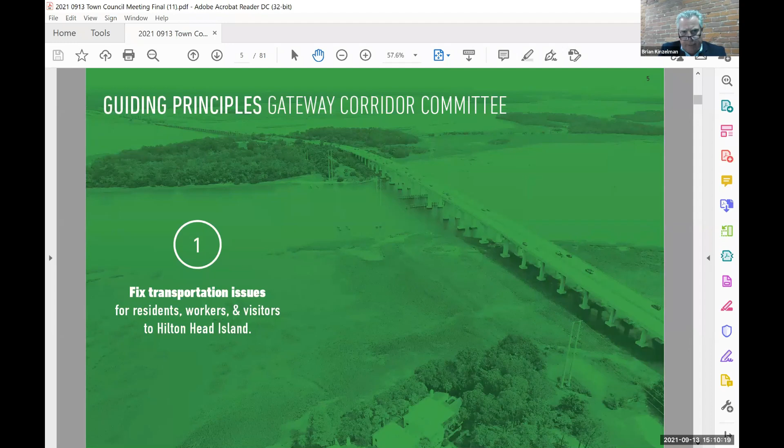The guiding principles, as the corridor committee had put together: the first one is really DOT's goal and principles, and that is to improve and fix the transportation issues as they are perceived to and through the island. Two, though, is the quality of life for the island and everyone affected by the construction and by the traffic itself. And thirdly, to create a gateway to this magnificent community.

This is one of the premier communities in the country, one man's opinion. I don't think I'd get much argument, certainly on the East Coast. The magnificent environment and the water bodies are really our calling card. How do we protect those?

So again, Sean ticked off these. I won't repeat them, but we had numerous contact points, not only with leadership and council, but with the public as a whole. I want to acknowledge the role that the town staff played in this, including the town manager, Sean, and Darren, the town's traffic engineer, who have done a lot of hard lifting on this, and it's greatly appreciated.

What we heard in general terms from the community, everybody's in agreement. We need an attractive gateway to the island, a high level of aesthetics to complement this magnificent natural environment. Those aesthetics will largely be dealt with at the future design phases of the project. Right now, we're dealing with alignments and larger concepts.

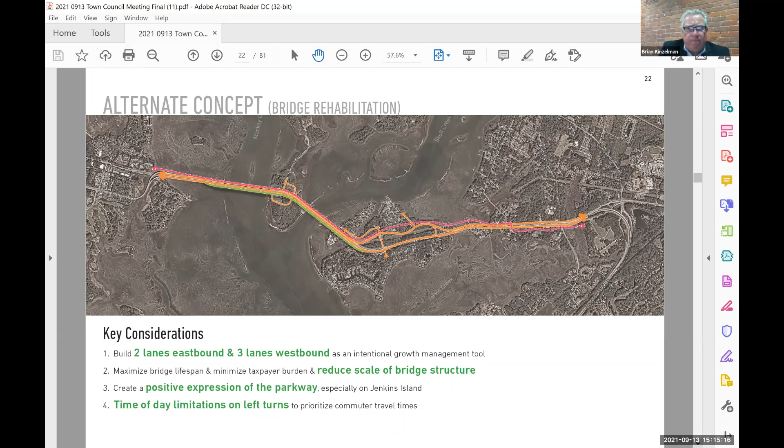So from an engineering standpoint, as suggested, this is 3 lanes westbound, 2 lanes eastbound. It does, though, result in saturated flow. What does that mean? That means a lot of automobiles stacked nose to tail through some of those key travel times.

Restrictions to traffic movements, turning motions, left turn motions are necessary to maintain that traffic flow. This 2-lane eastbound would preclude a traffic signal at Windmill Harbor. There just isn't enough lane capacity to allow for stacking to satisfy a signal without causing traffic to back up over the bridges. The existing bridges must be modified.

There's, as they say, no free lunch. Even if we preserve those bridges and take advantage of their useful life, they still need some work, so that has cost implications as well. Skull Creek Bridge approaching Pinckney will require some wetlands impacts to make all of that circulation work. That's unintended damage, but that is parcel of this scheme.

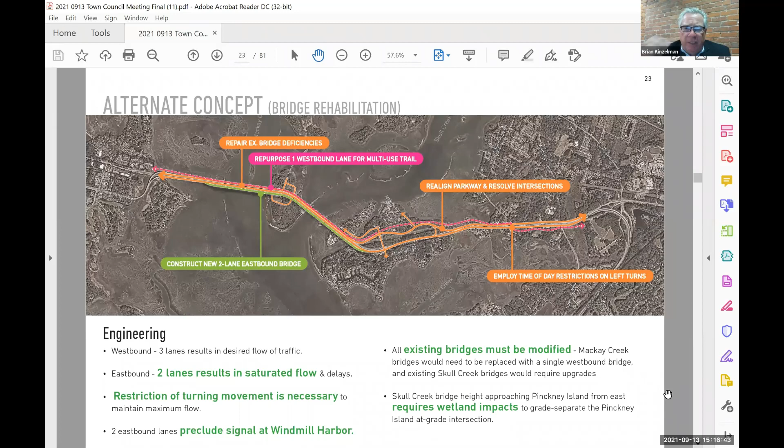But what it does take advantage of is the fact that we've got less pavement and we take advantage of more town ground to create more of an experience. From a performance standpoint, moving automobiles, this results in an additional 9 to 10 minute delay. That's based on our traffic engineers, HDR's traffic engineering analysis, against what DOT has forecast in the future. So it does cause more delays, more traffic and travel time.

During non-peak hours, left turns would be allowed in both directions, but that would be restricted at certain times of day. There's multiple bridge redundancy, so for emergency evacuations, that is certainly a positive.

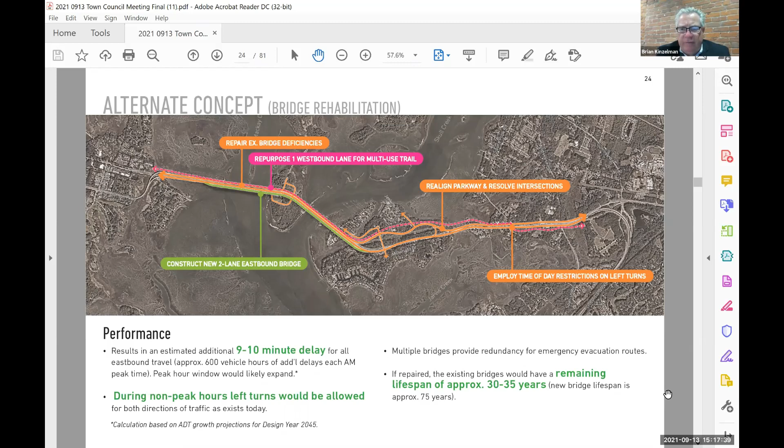If we do repair those existing bridges that remain, we take advantage of 30 to 35 years of useful lifespan within those bridges. From a logistical standpoint, this is a bit more complex than the DOT scheme. That would likely add about 2 more years of construction and design time to the project. I think over time, with that additional time, we'd be eating into any cost savings that there may have been.

Restricted left turn motions are very difficult to enforce. It can be done with signage, can be done with physical barriers and extensive signage, but nonetheless, it's an enforcement issue. Left turn lanes that would be diverted are going to cause folks to continue downstream, and that has implications for those downstream intersections, specifically Gumtree and beyond, for those wanting to make those left turn motions into Hilton Head Plantation.

So there are positives and there are negatives, as you would expect with any concept. The cost, again, one of the keys to this concept would realize a $20 to $40 million savings on the bridge construction compared to what DOT has estimated. But again, the extended timeline might start to eat into those cost savings a bit.

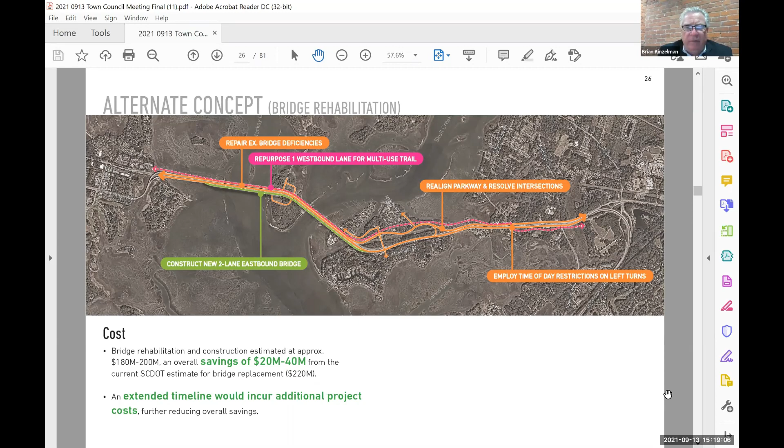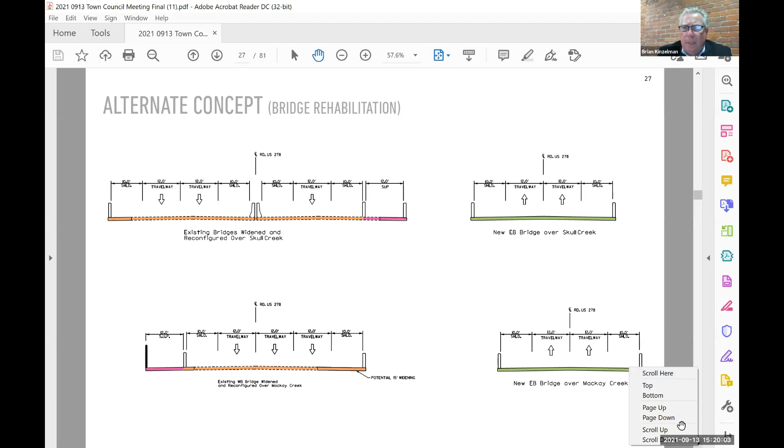Legitimate concept, given maybe the desire to have more control, another tool in the toolbox relative to island growth, and also to save legitimate taxpayer dollars.

So the second concept that has come to our attention is what we're calling the grade separation concept, and that is to create highway construction, roadway construction akin to the Cross Island, literally all the way from Moss Creek to the Cross Island split with no interruptions, no intersections.

This is a shot of what that looks like through the Stoney neighborhood. Again, this is 3 lanes in each direction. It would prioritize unimpeded traffic flow, so for those going with speed to the south end of the island, this will get you there. It eliminates all traffic signals through Stoney.

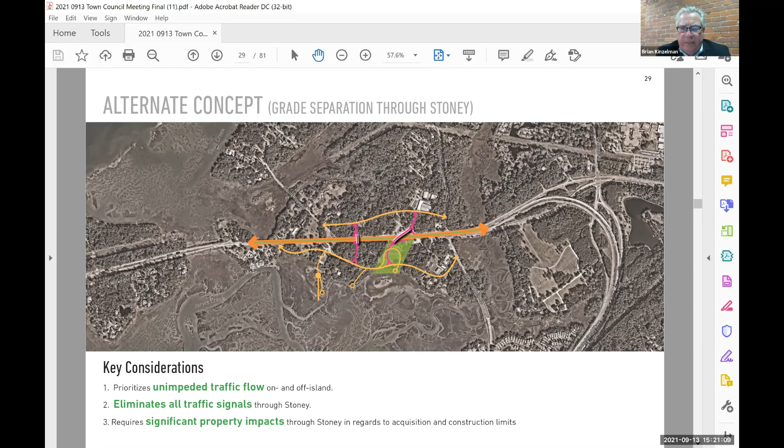It does represent some significant property impacts in the Stoney neighborhood, just due to the real estate necessary to make this work. What this does suggest is that there are 2, possibly could be done with 1, overpass bridges.

You would have exit and entry ramps as you do on limited access highways. You would have backage roads that interconnect those bridges, connecting Squire Pope to Wild Horse, Chamberlain to Spanish Wells, and that's where the east-west circulation happens. North-south passes over the bridges. There are no signals or intersections along the route.

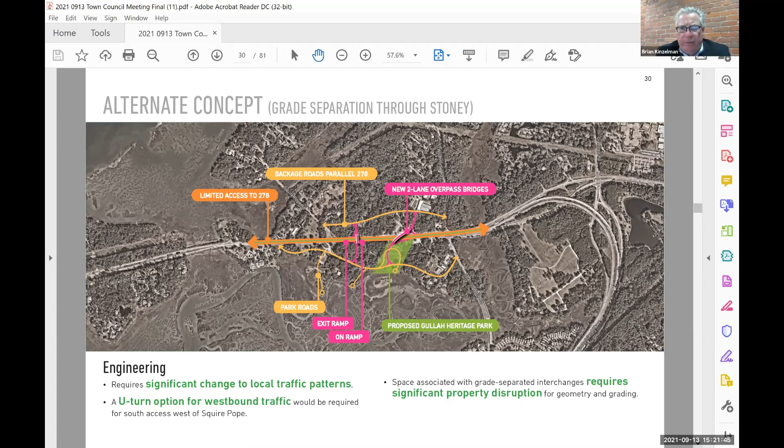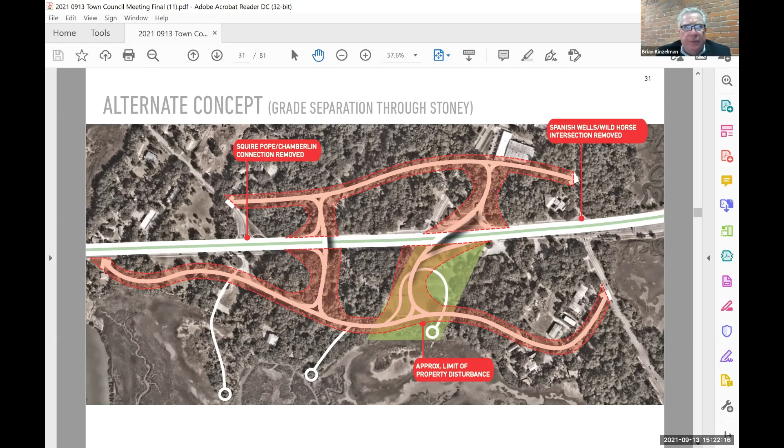So again, the performance of this improves the mainline flow. It likely increases congestion downstream, again, likely at the Gumtree intersection.

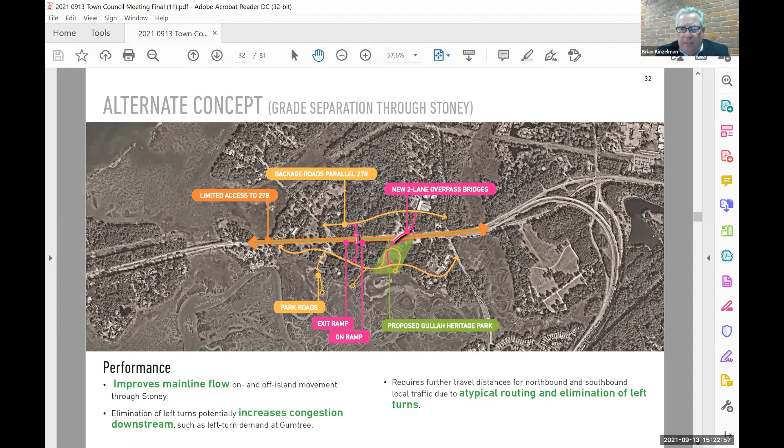This provides an atypical routing for people wanting to get north and south. You're having to get off at an exit ramp, cross a bridge, maybe even double back as it were to get on your assigned roadway, but it's all with unimpeded traffic flow relative to signals on the main line.

The cost and logistics of this, as I mentioned, there's some significant land disturbance due to this roadway construction. That's through the Stoney neighborhood, probably the most sensitive, in fact the most sensitive ground of the whole project. It would expand the project schedule and budget, and certainly for these elevated crossings, that is expensive construction.

The benefit to this is free and safe passage from east to west. That's the benefit of this grade separation.

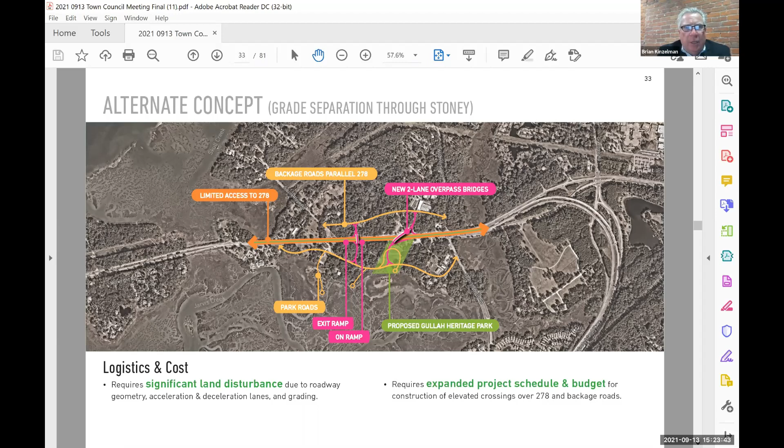We felt it was important to bring those alternate concepts to your attention. That was not our charge, to reconsider all of the precursors to DOT's work, but those were brought to our attention, felt to have some legitimacy, and important to share with the community. Again, our charge has been to create a parkway and not a highway.

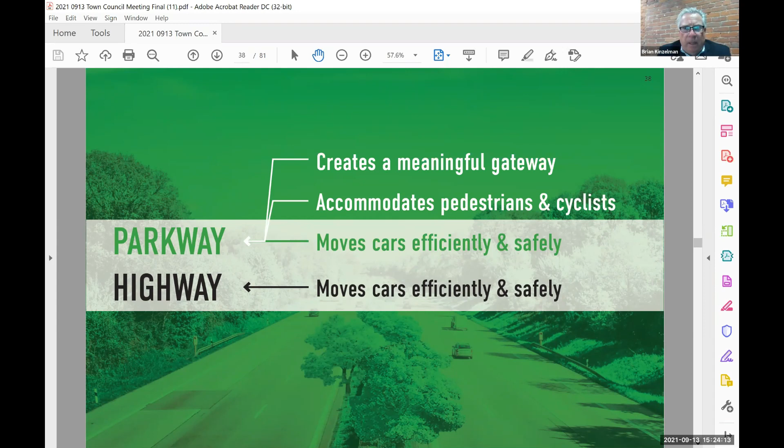We can move automobiles safely and efficiently, as does a highway, but we need to accommodate pedestrians and cyclists. We need to create a meaningful gateway. We can satisfy all of those issues.

A summary of our key recommendations is, again, to create that memorable gateway, a long-term vision for cyclists and pedestrians, eliminate raised curbs in the medians where possible. Let's use those medians as we do elsewhere on the island for drainage, vegetation, and for breakdown when necessary.

Consolidate drives and curb cuts, reduce property impacts to the extent possible, especially through the Stoney neighborhood. Design intuitive intersections, so that we're not confusing not just our residents, but our visitors as well, and incorporate design features that calm the traffic and reduce the speeds.

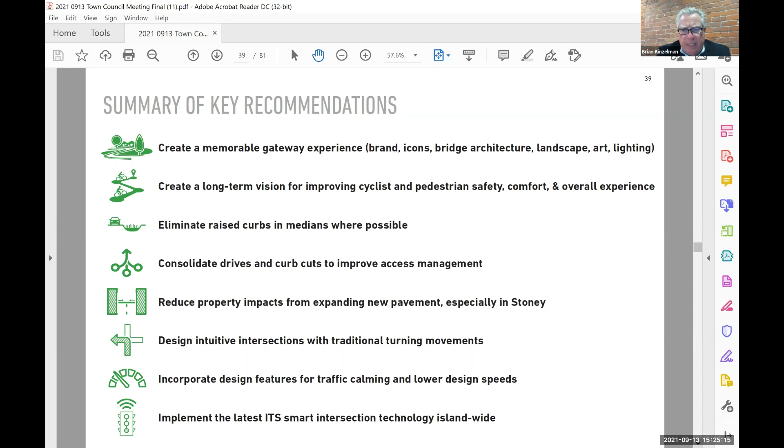We can move automobiles at reasonable levels with reasonable times. We do not have to create a speedway here. Utilize smart intersection technology and signal technology everywhere on the island. That certainly would be wise.

Relative to pure traffic movement, the traffic recommendations are 14-foot minimum non-motorized lane over the bridge with some viewing. Right now, the DOT bridge has a 10-foot wide path. We think something wider than that to accommodate bicycles and pedestrians and to take advantage of these magnificent views of the deep water are important.

This is not a new concept, it's used throughout the world. 11-foot travel lanes versus 12-foot travel lanes and a 40 to 45 mile an hour design speed. Safe pedestrian and bicycle access onto Jenkins, which does not exist today.

Variable median width so that we can calm traffic and provide real estate for aesthetic treatment and landscape. Smart signals, eliminate the confusing DOT U-turn devices. Eliminate median curbs where possible for all the reasons stated previously, and reduce as many curb cuts and provide alternate access points for some of the commercial and residential properties, specifically in Stoney.

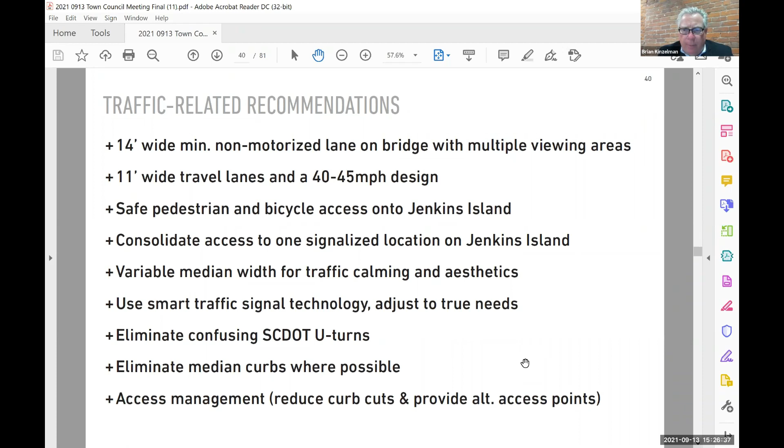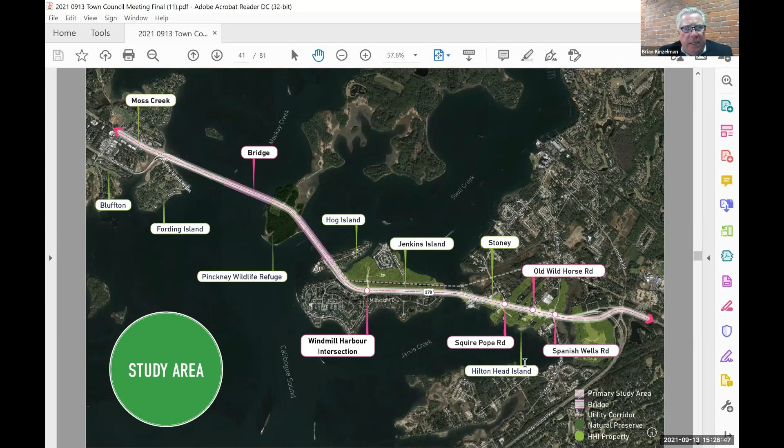The study area starts at Moss Creek on the west and goes to the Cross Island on the east. We've broken that down into 4 segments, and I'll speak to each of those independently relative to recommendations. First, with Moss Creek.

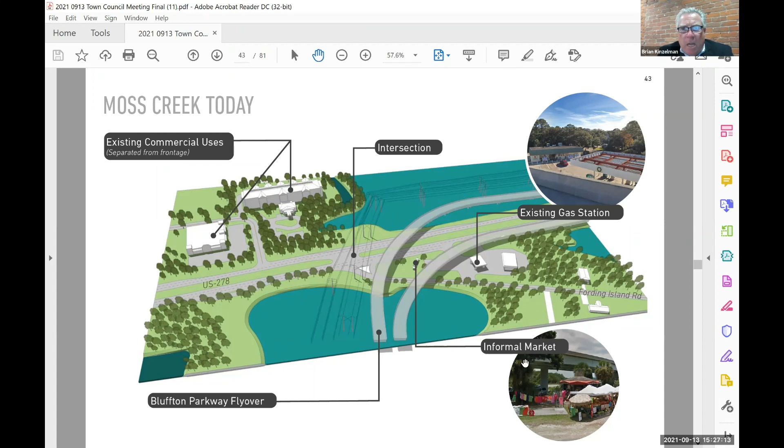As you see it today, we've got the Bluffton Parkway Flyover, existing commercial development on both sides of 278, existing gas station and informal market at the Flyover. We think there may be a better solution here. Our local alternatives suggest that we tie Fording Island Road into the Moss Creek intersection, eliminate that curb cut underneath the Flyover, and be intentional about a market pavilion where the service station is, that likely is not the highest and best use for that site.

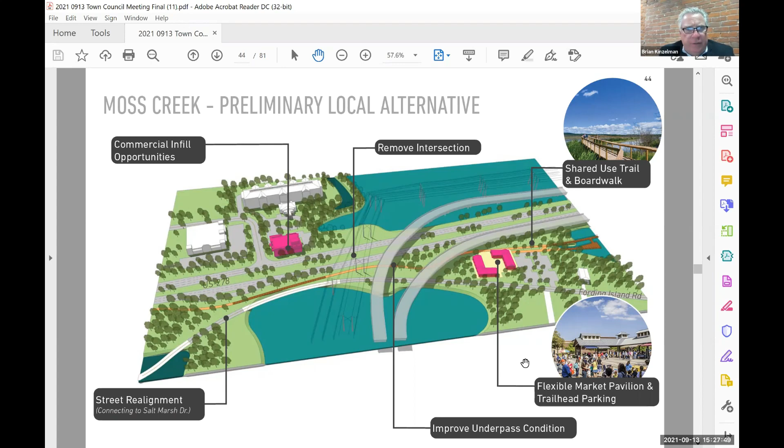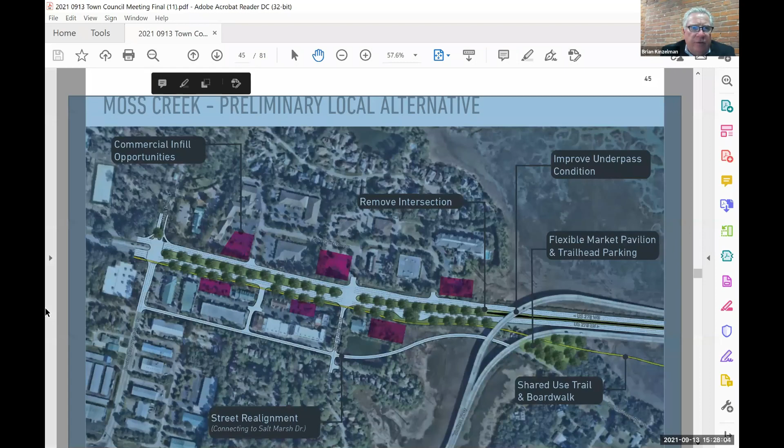And there's great commercial infill opportunities as well that are of benefit, not just to the Bluffton and the Moss Creek residents, but to islanders as well. In a larger plan view, you can see how Fording Island Road would extend behind this retail, tie into Moss Creek, also into this commercial development that is... I just lost that screen, sorry.

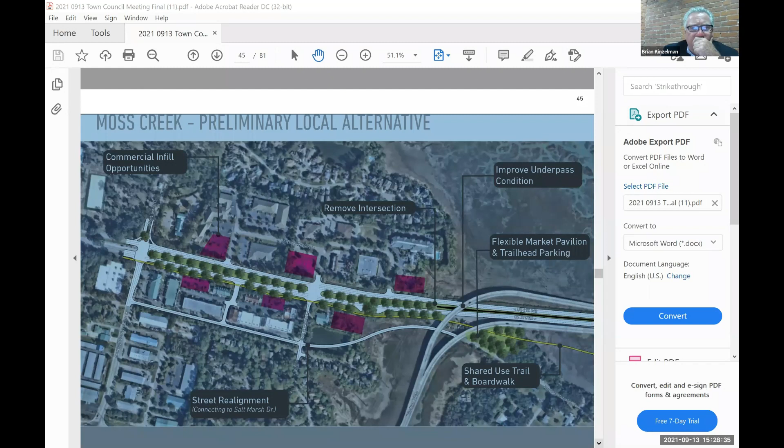For some reason, I just went blank, folks. Brian, this is Krista, I have your presentation pulled up if you'd like me to pull it up for you. That'd be great, I don't know where this went. Okay, hold on Krista. There it is, it's back I think. Okie dokie, thank you dear. Mm-hmm, yeah, sorry folks. Doggone it, it just went again. Yeah, I'm back. Oh my, oh my. Krista, maybe. Brian, we can still see it, we see Moss Creek preliminary local alternatives. I do not, let me... There it is, I got it now, fellas. Thank you, and gals. Sometimes stopping and starting again helps on this. There we go. Here we go, there we go.

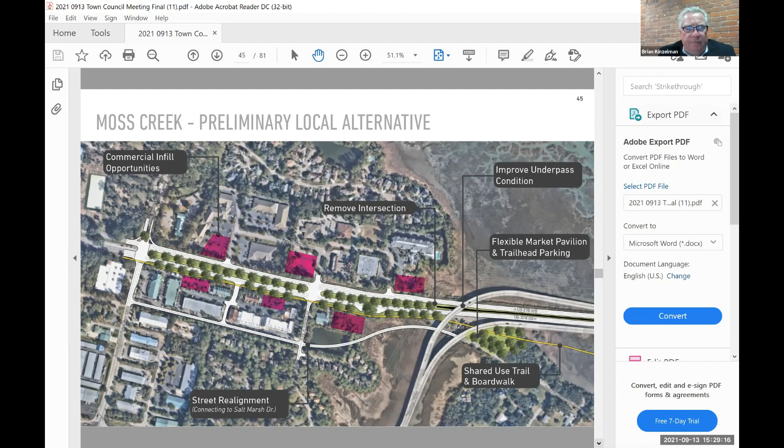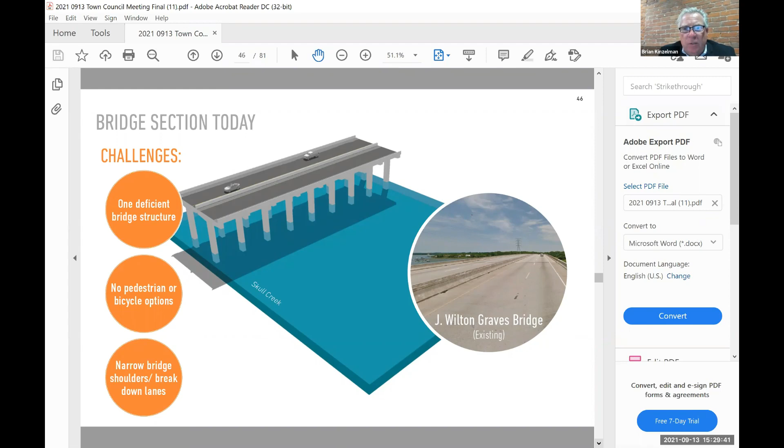Now onto the bridge section. Again, what we see today over Skull Creek are 2 bridges, 2 over Skull, 2 over Mackay. We've got 1 bridge that is deficient. We've got no pedestrian or bicycle accommodations, no shoulders for breakdown lanes. As we all know, what we do have are magnificent views to the water and the island beyond.

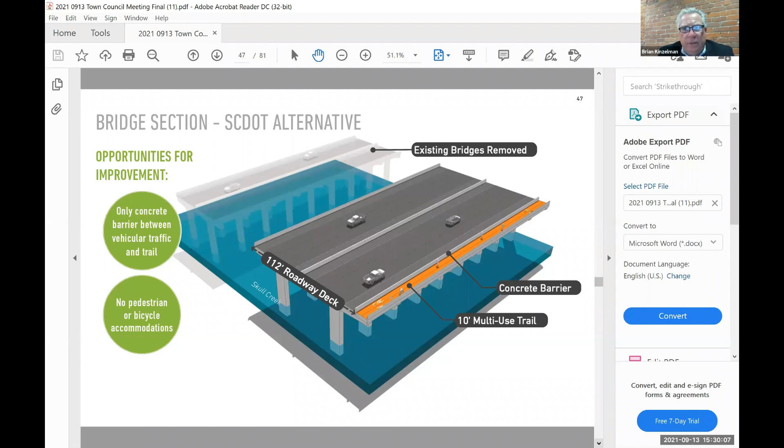DOT has suggested that we have 1 bridge deck, and remove the rest of the bridges. That's a wide bridge, 112 feet wide just for vehicle movements, and a 10-foot wide multi-use trail with a concrete barrier separating pedestrians and bicyclists from moving lanes of traffic, with breakdown lanes on both sides of those 3 lanes of moving traffic.

This local alternative suggests the widening of that multi-use trail, the introduction of overlook areas, scenic overlooks, and respites for people riding their bikes or walking. That's a long haul, certainly from the island to the mainland, and to create 2 separate bridges.

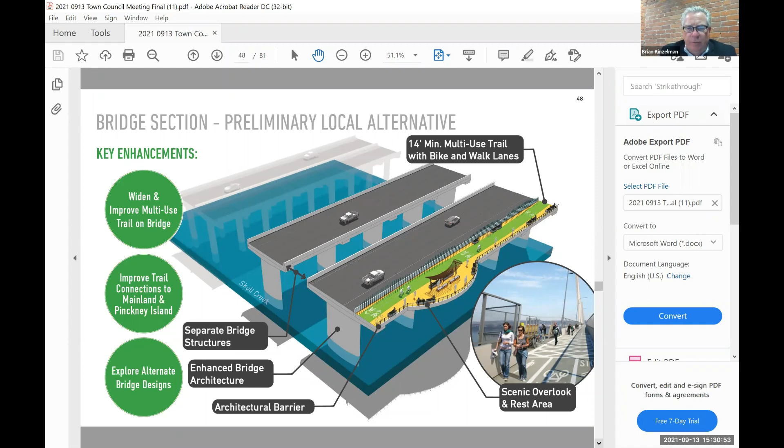So we're not looking at 110 feet of pavement, but 2 smaller structures, minimizing the lanes as much as can be done practically, and possibly having 1 breakdown lane, not 2. That just reduces the amount of suspended concrete over the water.

On to Jenkins Island as that touches down on terra firma. There are no pedestrian and bicycle options today. We've got safety concerns at Jenkins Road and Windmill Harbour. The good news is we've got a lot of town-owned ground that's on the north side of 278.

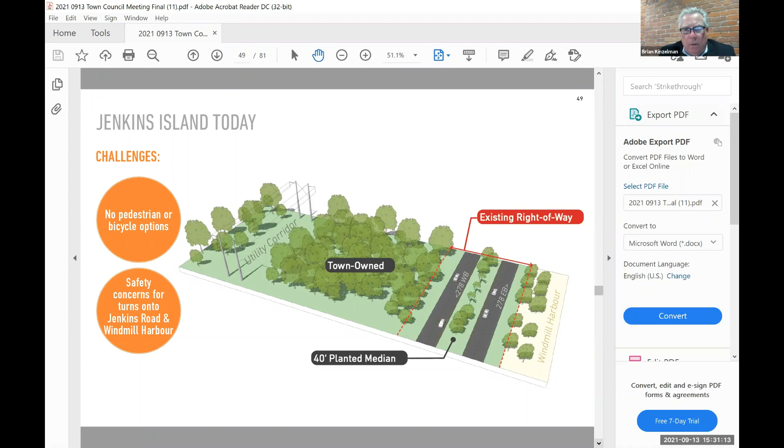That's what we see today with the Jenkins Road coming out to 278 from the RV campground, which is a troublesome intersection. Certainly, we've heard from Windmill Harbour folks of the difficulties at that intersection as well.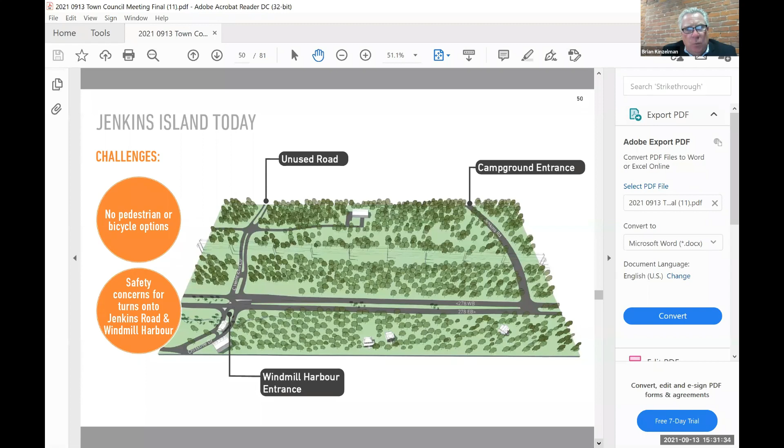The DOT alternative has minimized the median. They've minimized the buffer between any sidewalk or trail as well. If we provide that pedestrian bicycle accommodation, it's got to be attractive, it's got to be safe. We feel it needs to be separated from 3 lanes of 45-mile-an-hour traffic.

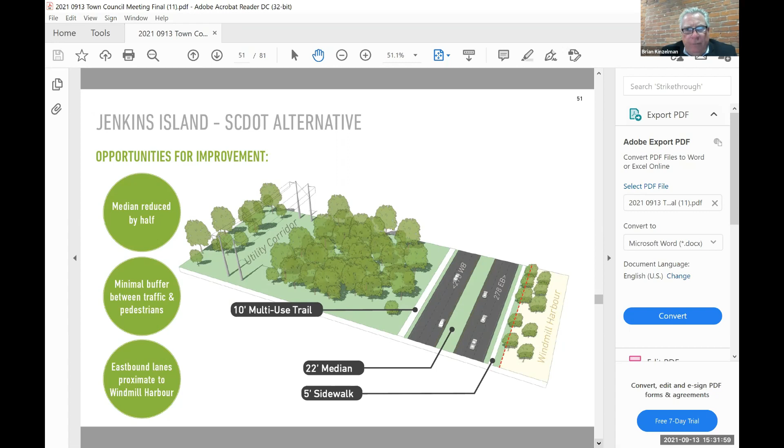So what we have suggested is take advantage of town-owned ground, move the entire alignment of the new Parkway to the north so that the eastbound lane would take over where the westbound lane is today, giving us more green space and breathing space between Windmill and the new Parkway, and allowing for a multi-use trail to pass through green space. It also allows us to capture in this varying median some of the mature vegetation that exists today as part of the town-owned property.

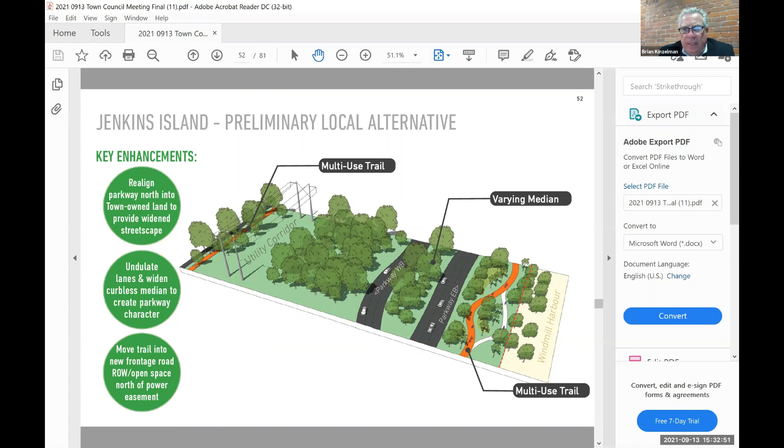And it allows for us to put a new connecting roadway behind the utility corridor and eliminate the intersection at Jenkins Road. Here's a different angle showing just that of Jenkins Road coming over to Heinrich Circle and then coming to a signalized intersection at Windmill Harbour.

That is a signal that would be, from what our traffic engineers are suggesting, 96, 97% in the green for the east-west travel. So there wouldn't be much stoppage of that traffic, but it does have turn lanes. What it does not have is crosswalks for pedestrians. So we're discouraging, prohibiting pedestrian crossing there, which allows us to speed up the signal, as it were.

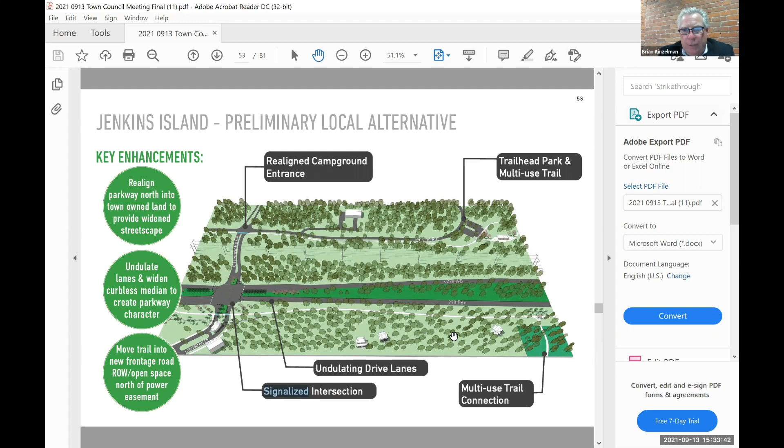You can see how the median is undulated and allows for us to capture some of that mature vegetation into the roadway system itself.

At a different view, panning out a little bit, the new bridges are going to be built to the south of the existing bridges. And this is a longer curve coming downgrade to the Windmill intersection, which would be signalized. That is a DOT recommendation as well.

We've eliminated this Jenkins Road curb cut. Again, it finds itself to the intersection, and you can see how we've got more green space between 2 ribbons of roadway, not 6 lanes of traffic and wall-to-wall pavement. I think this is a much more acceptable Parkway experience.

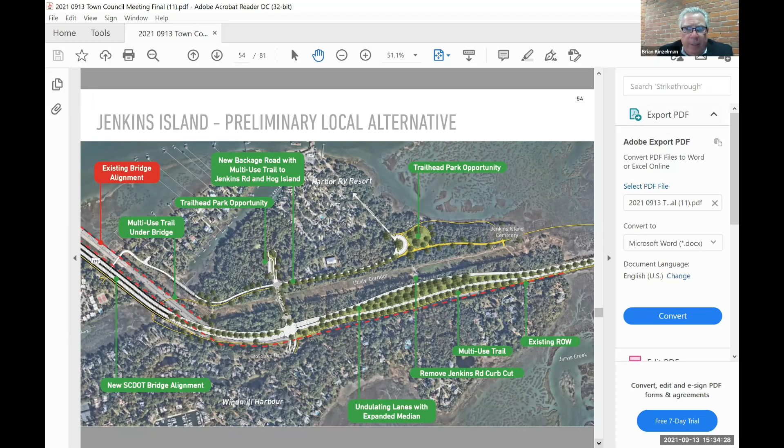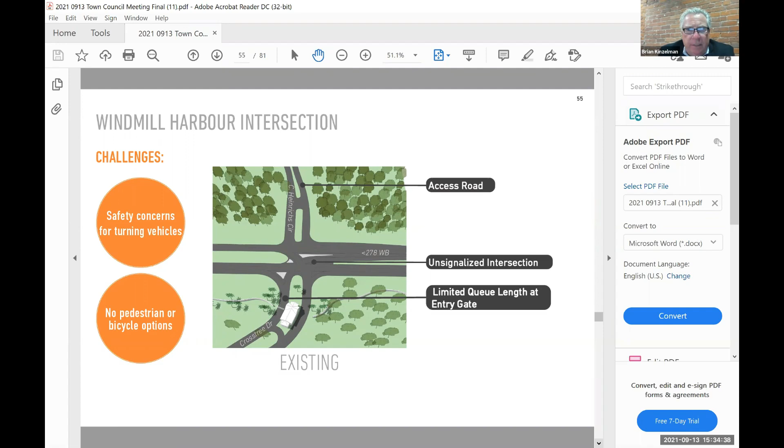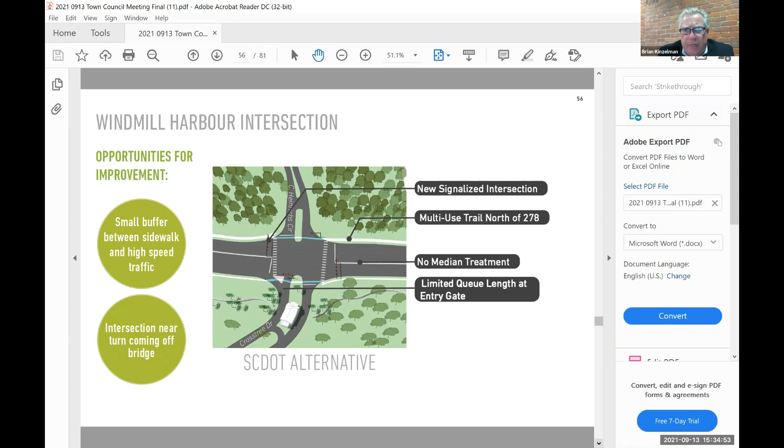The Windmill Harbour intersection, as you see it today, is not signalized. We've got limited queuing length at the gatehouse. There's opportunities to create buffers for sidewalk. Also, maybe expand this, consider a safer intersection relative to traffic coming off the bridge.

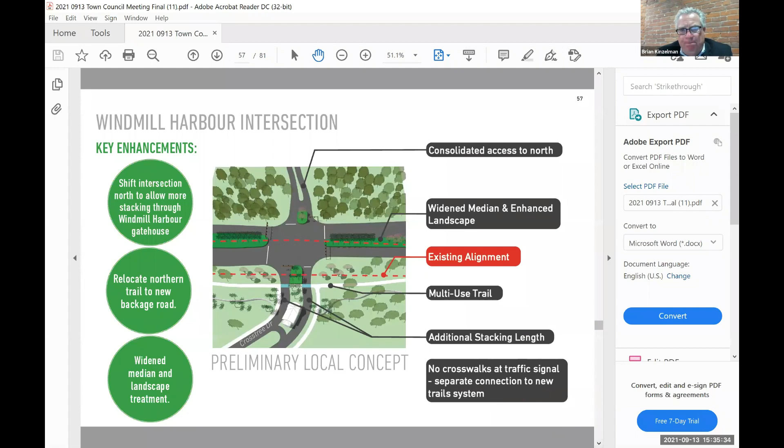These enhancements suggest that we continue the median to the intersection, not bringing those lanes of traffic together. We prohibit, discourage crosswalk traffic here. A multi-use trail can pass underneath the bridges a little bit further to the west. So north side and south side can connect one to the other, just not crossing at this intersection. And it provides for, again, more stacking coming out of and into the gatehouse at Windmill.

Moving into the Stoney neighborhood. Again, there's not much romance to the roadway as you see it today at 78 feet of existing right-of-way. Walkways directly behind the curb, very unattractive and unappealing, one man's opinion.

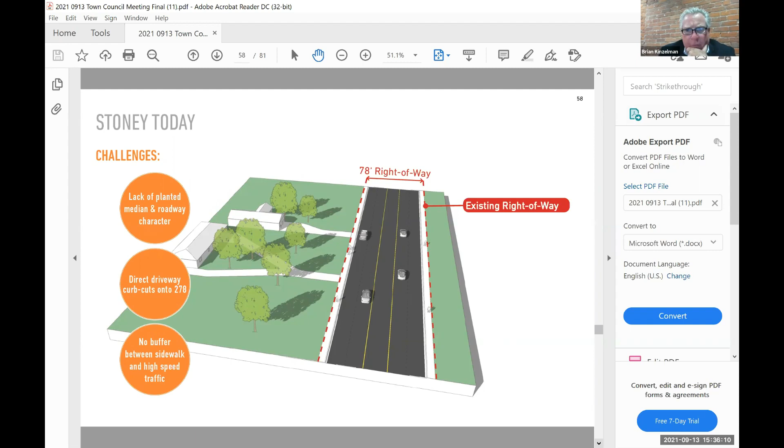Some separation seems to be in line. There's direct driveway curb cuts onto 278. Again, there's no buffer between those pedestrian accommodations.

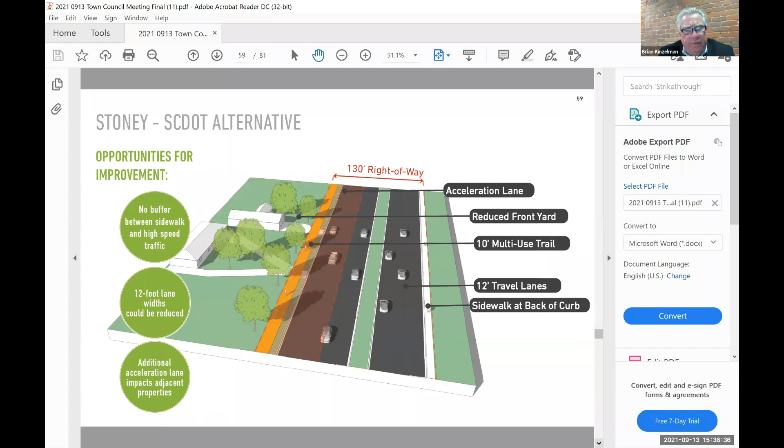DOT has suggested to expand that right of way to 130 feet, all to the north. There's no buffer on the sidewalk on the south, 12 feet of travel lanes and a 10-foot multi-use trail, and really cutting into the front yards of the residents on the north side.

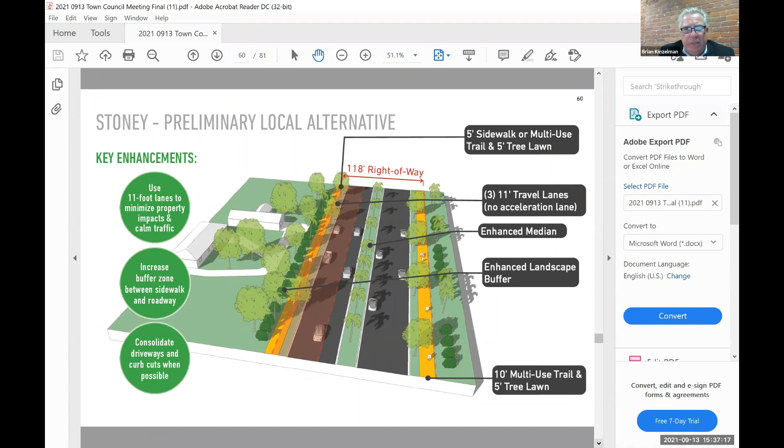This alternative suggests that we reduce the lanes of travel to 11 feet, reduce the acceleration lane coming out of Squire Pope, if not eliminating it in the westbound dimension, but truncate that before it adversely impacts some of the residents. Provide for 10-foot multi-use trails on both sides of the road, separated from the roadway itself, and enhance the median. Right now there is no median through Stoney, and to have at least some without further impacting these residents, that's the sweet spot.

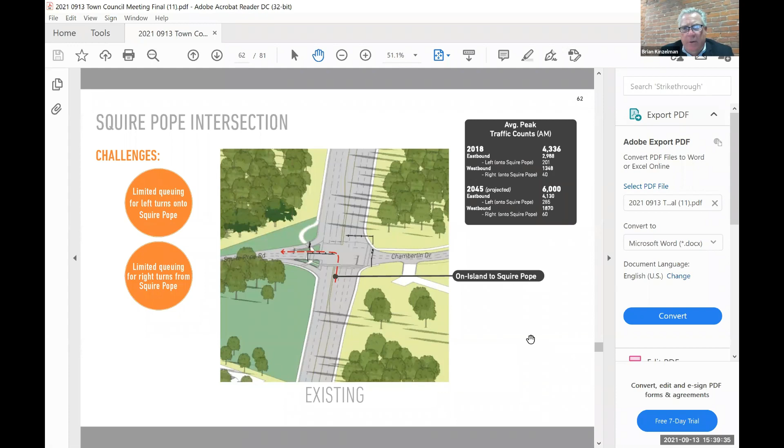There may be debate as to how those projections unfold over time and what other devices the town can put in place to minimize traffic, but it's probably fair to assume that traffic will increase.

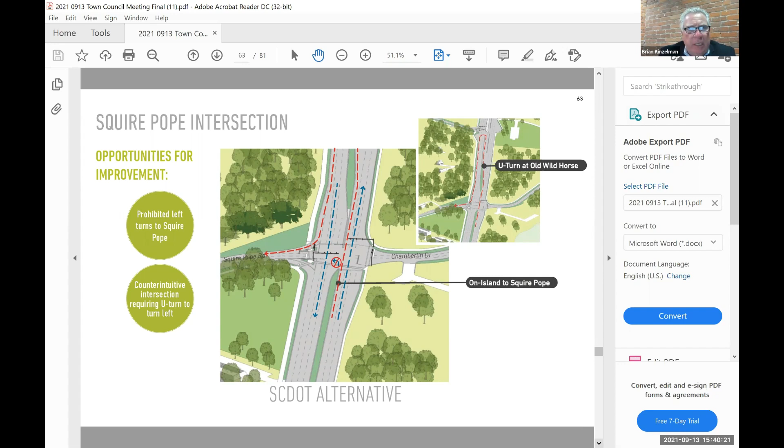So I think there's opportunities to make this more intuitive. The DOT has suggested there be no left turns eastbound on Squire Pope, and those wishing to get onto Squire Pope need to, going to this upper right diagram, go past the intersection, up to Old Wild Horse at a traffic signal, make a U-turn, and come back to Squire Pope, then head northbound. We think introducing such a traffic motion is confusing at best, and we think there's a better solution.

These enhancements suggest we have 2 lanes, 2 left turn lanes, again reducing the lane width from 12 to 11, providing for smart signaling, allowing those left turns to happen onto Squire Pope so we're not pushing the traffic problem further down the line, dealing with traffic where it needs to go but safely, and moving the trails away from the intersection onto town-owned grounds so bicyclists and pedestrians are away from it.

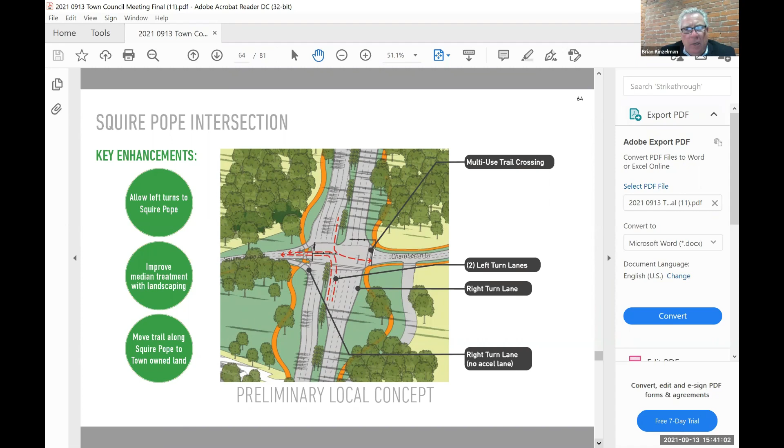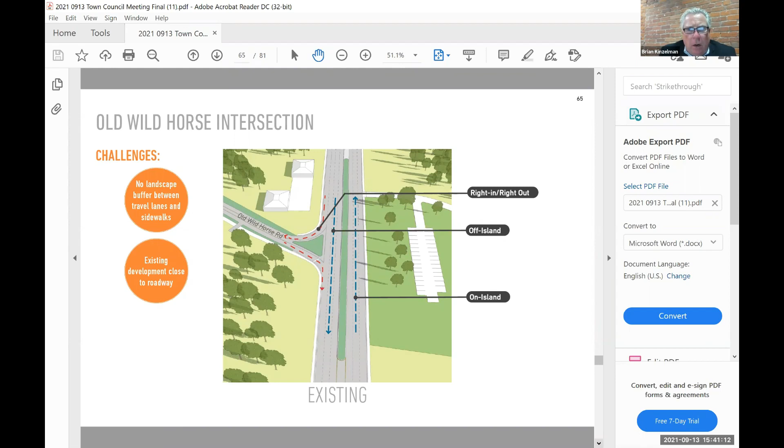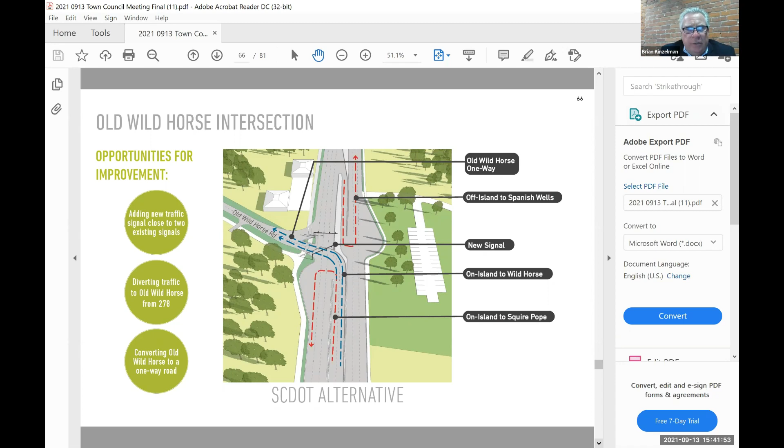At Old Wild Horse, part and parcel of the previous intersection, presently there are no left turn motions eastbound. DOT has suggested we put in a signal there, allowing not only left turns but also this U-turn. DOT is suggesting Old Wild Horse be 2 lanes, one way in that northeast direction. We think that's introducing too much traffic to a roadway that isn't sufficient in capacity. It's a neighborhood street, and it introduces another signal to the entire course, which seems counterintuitive relative to what we're trying to solve: elimination of signals and curb cuts.

So our enhancements suggest there is no new traffic signal, and we maintain the existing layout, not allowing those left turn motions, keeping Wild Horse as a 2-way neighborhood street and not diverting any more traffic onto it.

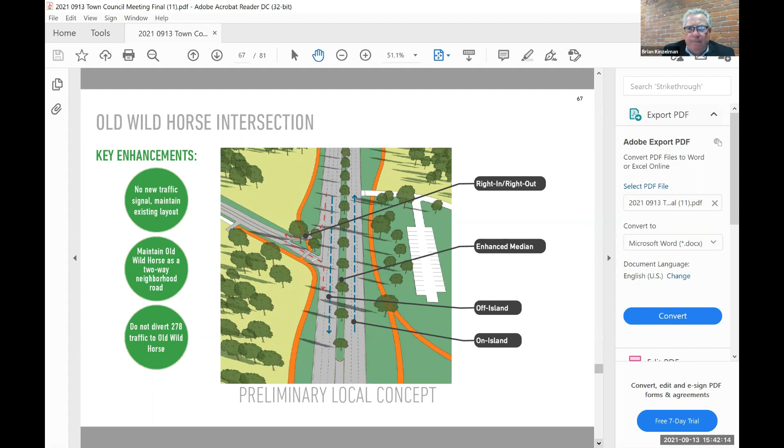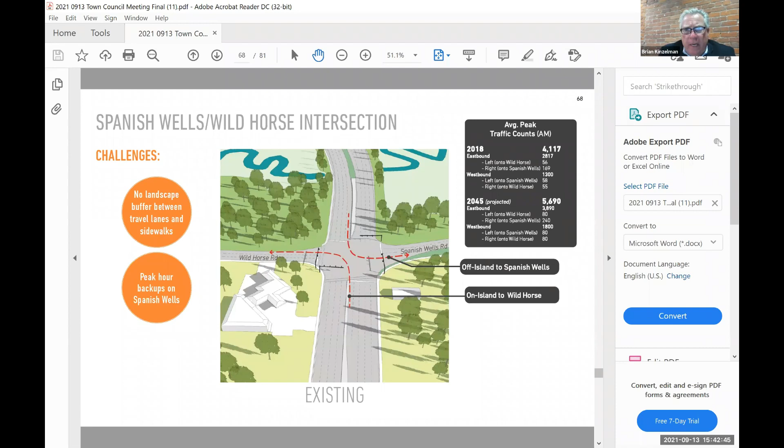What that then does is bring us to Spanish Wells, the next intersection to the east. There's no landscape buffer. This is a large intersection, as we all know, as it stands. There is peak hour backup onto Spanish Wells. You can see the projections upper right as well, 4,100 three years ago to almost 5,700 in 2045.

DOT's recommendation is that we eliminate left turns at both of those intersections and use the U-turns and the jug handles, as they call them, that were shown as part of the Old Wild Horse intersection. So if you do not get off at Old Wild Horse and make that motion to the north, you find yourself at Wild Horse, you cannot make that left turn, and you've got to find another way to get to parts to the north, which is likely down to Gumtree.

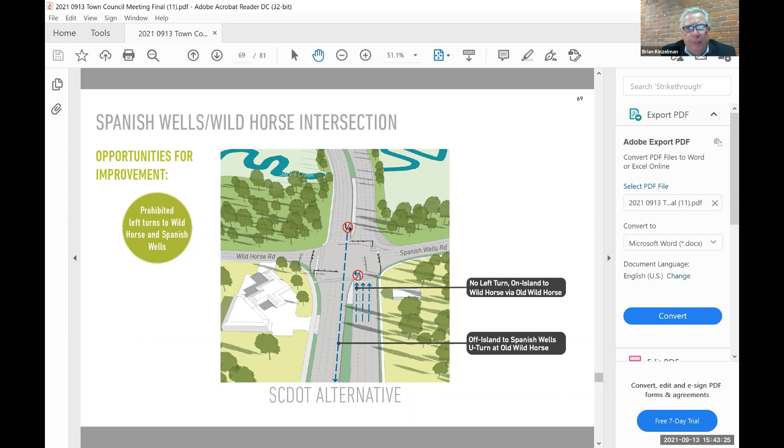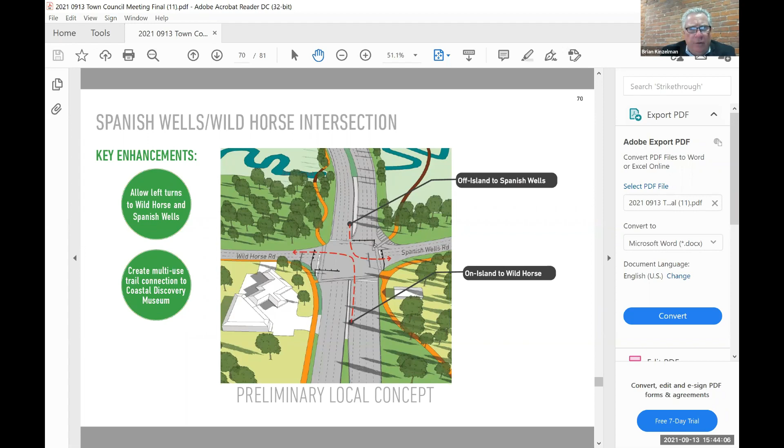We're suggesting that we allow left turn motions, but we add turning capacity at that intersection in all directions, and provide for a multi-use trail that is separate from the road all the way over to the Coastal Discovery Museum and to that beautiful park. So we're separating pedestrians and vehicles. We're making these as attractive and as efficient as we can, but not introducing those U-turn devices as DOT had suggested.

So again, this is Stoney taken as a whole. You can see that we've got a modest median through the narrowest part coming off the causeway. We've got enhanced crossings at Squire Pope and Chamberlain. We've got this connection from Chamberlain all the way to Spanish Wells through the parkland, the town-owned property, and a potential for a backage road through some configuration, Old Wild Horse to Squire Pope.

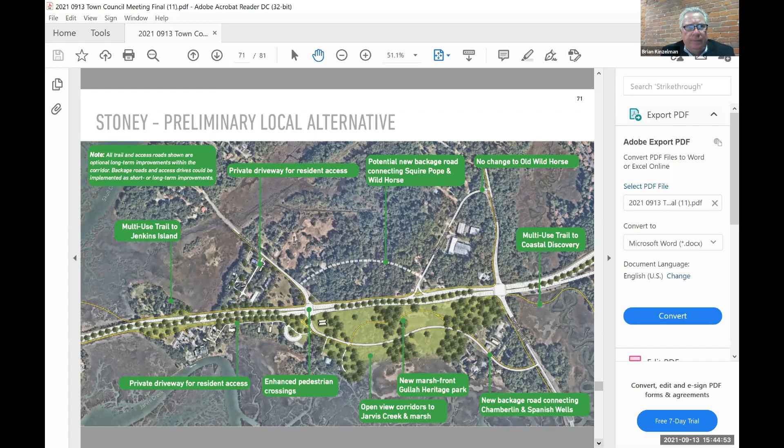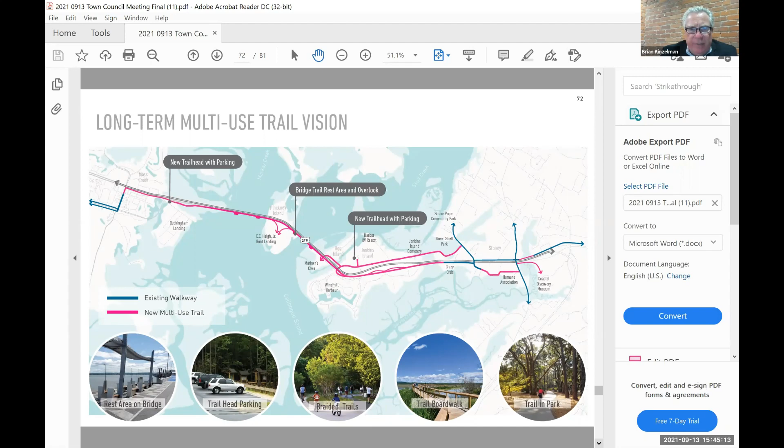And most importantly, no changes to Old Wild Horse, prohibiting those eastbound left turn motions. In all of this, we want to make sure that we connect all the destinations and all the trail system throughout from east to west, providing for new trails, connecting to existing walkways, and making sure that we got pedestrian and bicycle travel comfortably and everywhere.

Now, sorry for all the words, but what do all those graphics mean to you all? This is a summary of those recommendations that I just went through that start at the east and move to the west. And that is to encourage and support that Moss Creek area improvement. That is not part of Hilton Head Island, but I think we can be supportive and work with the county and other private owners to make that as successful as possible.

Establish the gateway experience at the west end of the Mackay Creek bridges as you come underneath eastbound, underneath the Cross Island or the Bluffton Parkway. That is where we want to establish the welcome to Hilton Head Island experience. Certainly nothing that literal, but take advantage of landscape, icons, public art, lighting, comprehensive signage. That's really where the experience begins. That's your first real view of the open water with the islands beyond. It's magnificent as it is, and I think we can improve upon that.

Reduce the bridge mass with two separate bridges. Reduce the bridge lane width. Provide for a 14-foot wide bicycle zone with overlooks. Pay attention to bridge design and details as this project moves forward.

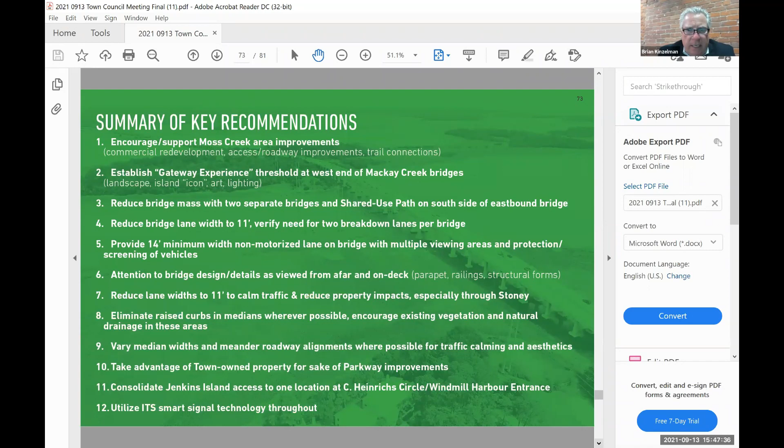Let's encourage that natural vegetation as we have elsewhere throughout the Parkway. Vary the median widths for all the reasons previously mentioned. Take advantage of the town-owned property for sake of these Parkway improvements. We can take the roadway into some of that ground and make for a much better experience. Jenkins Island consolidation of intersection, smart technology in our signals.

Go back to traditional turning motions, intuitive intersections through Stoney. Eliminate those, what we feel are confusing U-turn options. Eliminate left turn traffic onto Wild Horse in that eastbound direction. Reduce curb cuts at every turn as best we can and provide safer access for the private property owners. Provide trails on both sides of the roadway. Create a comprehensive and comfortable bikeway and pedestrian system that doesn't exist heretofore.

Create a new park south of the Parkway, as we call it, the Gullah Geechee Park. What its actual program and name is yet to be determined. But I think there's a great opportunity again to add a visitor center to that park, and let's intentionally showcase the heritage that makes Hilton Head what it is. Open at every turn, open and encourage views to the water. Volunteer growth has mitigated some of those.

As we move into final design, the town is going to have to pay special attention to signage, landscape, public art, architecture. The devil's in the details, as they say. And at this juncture, we're dealing with large concepts, but that detail is going to be critically important to success.